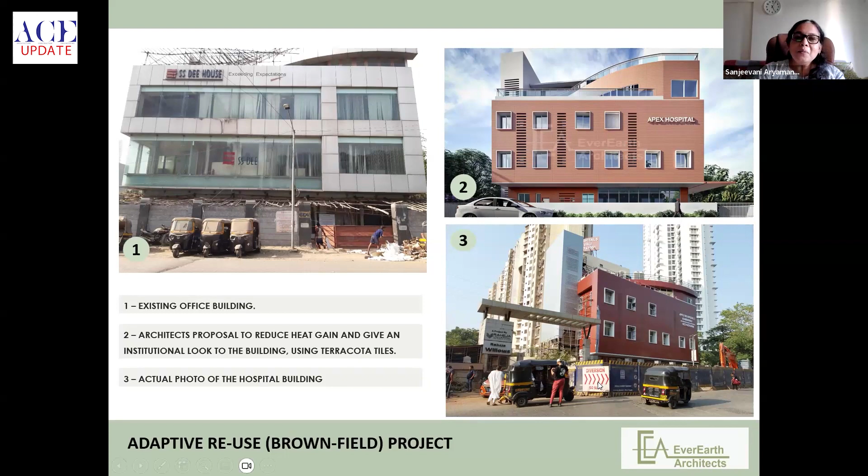So then, basically a greenfield and a brownfield. In healthcare we see this very distinctly, that there is a doctor who has already seen some property and wants to make a hospital here, has bought this, and now wants you to do this. So this is basically a brownfield development. This is a very sustainable approach because, as I told you, it is having everything ready, unlike in a greenfield project.

You have to design from scratch. You have to put all your infra in place. You have to bring in material from outsourcing, from some other place, so we are reducing on the carbon footprint. It's already practically zero here because you're already using whatever is there in place. So first of all, we try that if the client has an existing building, we try to give him solutions into that. But if it's not fitting in, and if he really is insisting, then we have to go for a greenfield development.

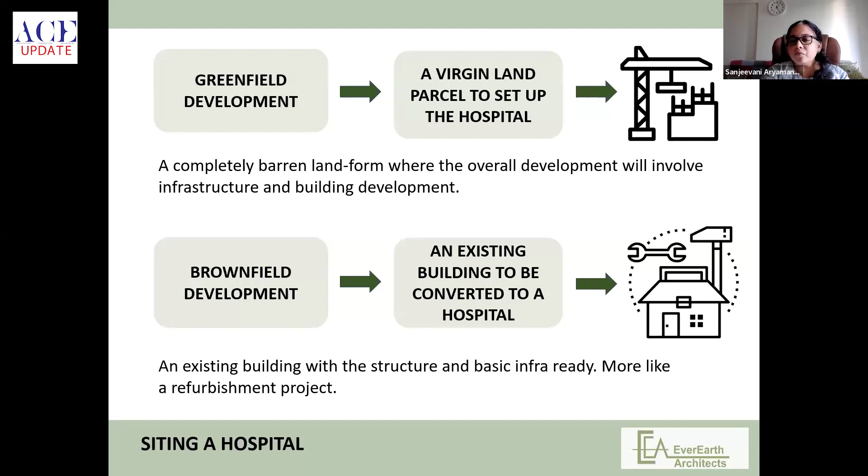This is one building where, again, in a hospital the facade becomes a challenge because none of the floors are repeated, they are not replicated. So there is an OPD on the ground floor, probably endoscopy on the next floor, then there comes an OT where there are no windows, cath lab where there are no windows. So there are certain floors with certain windows, then other floors with windows which are not aligning.

So usually we have a false facade to it, where we also take care of external plumbing, all these services that can be taken from outside, and have more of a regularized facade, so that it gives at least a better aesthetics to the building. But this also helps us create a buffer for the heat gain, so there's no direct heat gain onto the envelope of the building.

So in ICUs or in OT and all that, these rooms basically have more of HVAC to be dealt with. So you can actually, in a healthcare building, segregate air conditioned space and non-air conditioned space. That exercise also is taken up. I'll come to that further.

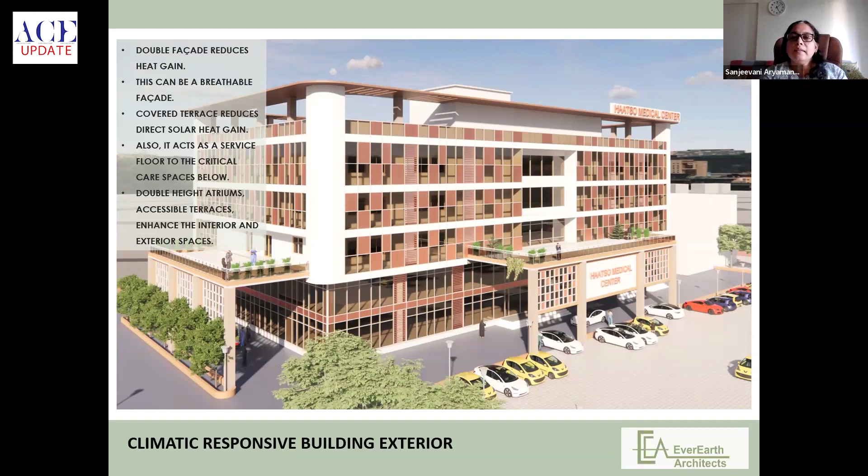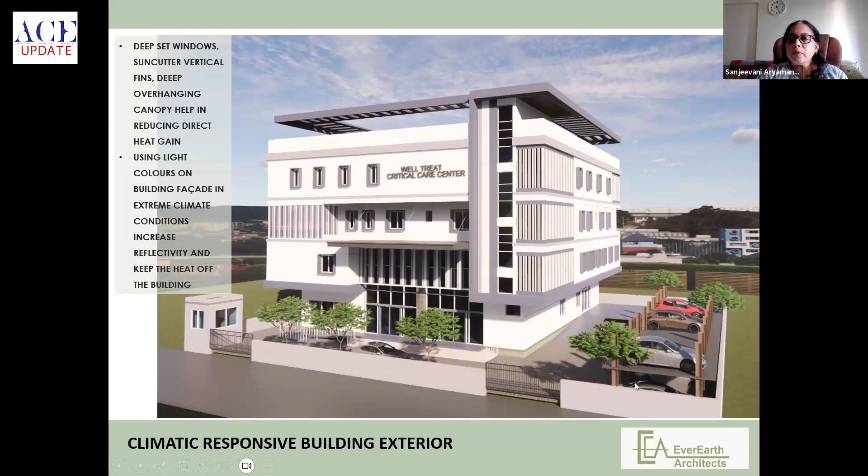So yeah, again, these were like deep set windows with fins. Then there is a canopy which is again having shading to the glass and all that. Again, the terrace is partly shaded so that internally there are solar panels and all, but at the periphery we had a pergola type, or like an umbrella to it. All our MEP spaces were again with louvers and all that, so it is a breathable space, most of that deep set with vertical louvers.

This was in a hot and dry climate I was talking to you about earlier. So the building is facing, you can say, north south, or rather more northwest, so we are not having more of an eastern facade. Because of the wings, the major facade on the east and west is broken, and there is a space between the two buildings of around 10 to 12 meters, which helps good wind flow between these two building floor plates.

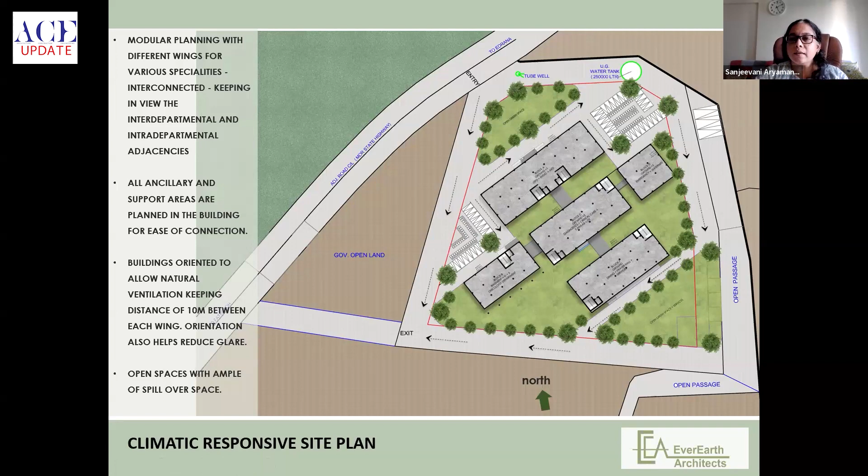Also, why we did this was to do one more thing. Now this first block is our completely daycare, where we have OPDs and all these things, so in the evening this block is completely shut. Only the critical care and the residential, that is the IPD floors and all that, these are working. So your HVAC and all these things are totally segregated from the critical areas, so you can actually save on your energy. When you're shutting this off, it's not consuming any energy, so we are reducing energy. Segregating the departments, having it totally out of the main critical zone, is also helping us reduce the energy requirement. That was another elevation where we were using the same fabric.

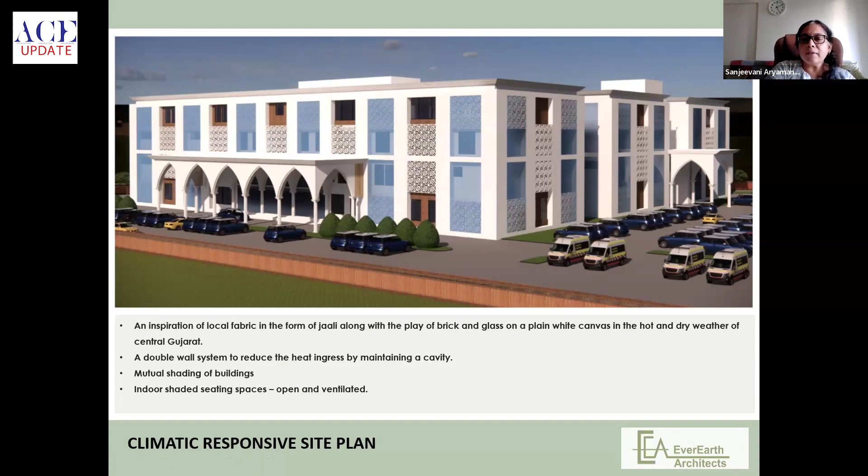This is again in Gujarat, but this is more of a trust hospital, which again had majorly jalis and more venturi effect, as Nikita was just talking about. And again, minimizing the glass. The client really wanted glass, but we tried to minimize it while also adding something more. So we had a play of glass, jali and brickwork, along with plastering and all that. That was another elevation, or the same building, which eventually developed like this.

When we talk about the building plan, again when we are saying a deep plan, this is our regular approach. Courtyards offer a better stack effect. Your lighting and ventilation are better resolved into a courtyard kind of formation. There is good ventilation here.

In hospitals where there are critical floors, like OT and all that, we are not doing courtyards there. But when it comes to OPDs, these kind of spaces where there is a lot of occupant load, you can have open spaces where people can go out, relax, and whenever their number comes they can come and sit. That kind of thing helps when we have a courtyard and some spaces around.

So this can be one block. Then the spine, then it's another segregated or different block, well connected, into a critical block, so the spaces are flowing into each other.

Linear plans are always better, where you can have light ingress from both sides. Light is very important in a healthcare building, and it is always a relief, because dark and shady spaces don't really work well.

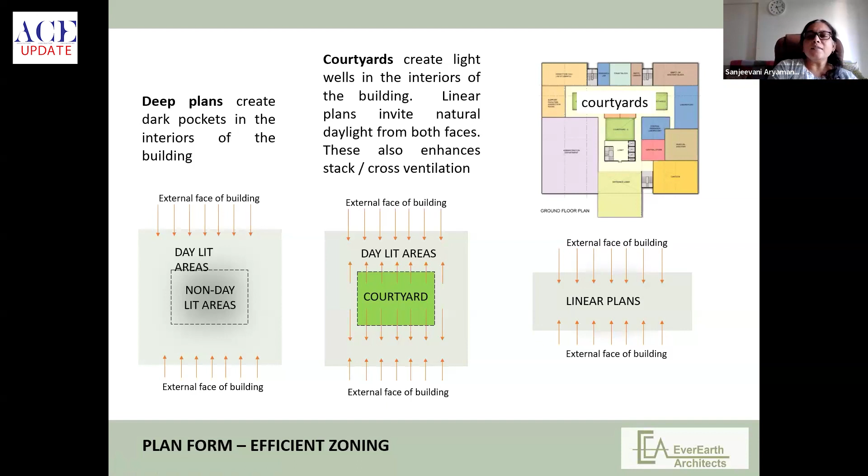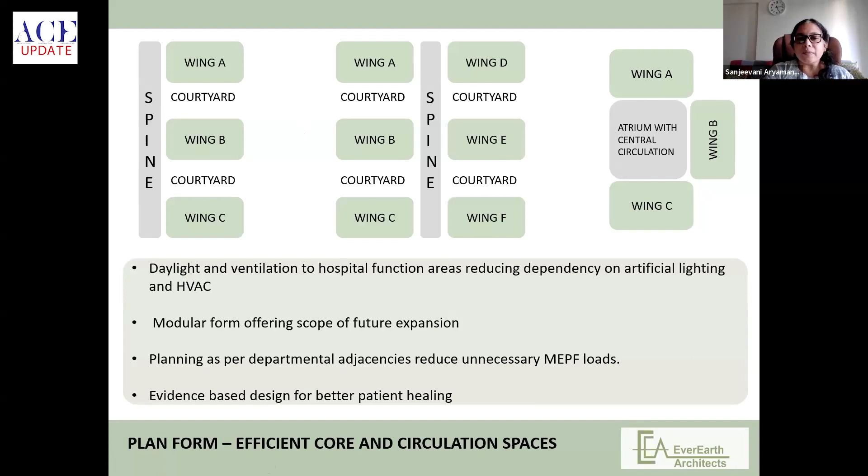It can give a sick building syndrome kind of effect, and it is not healthy. So basically how corridors are placed, how we can bring up modular planning, so that it is efficient and you can reduce the energy loads in different modules. Stacking of the floors, how we do the stacking, where the service floor is going to come, is also a very important decision in a healthcare facility.

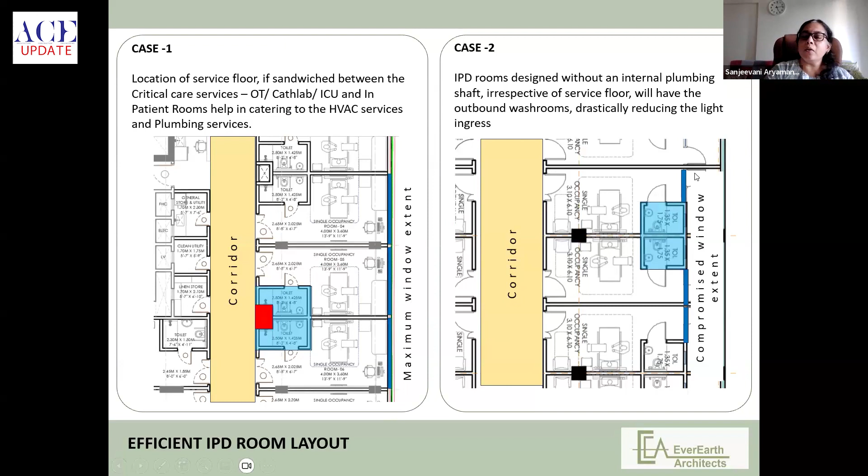Again, the corridor, basically in such rooms where we have a typical hotel arrangement, you have maximum light coming into the space. When there is a toilet on the external side, there is a minimum light window which comes through. Again, in an ICU for example, if the beds are facing towards the outside, it is a relief to the patient.

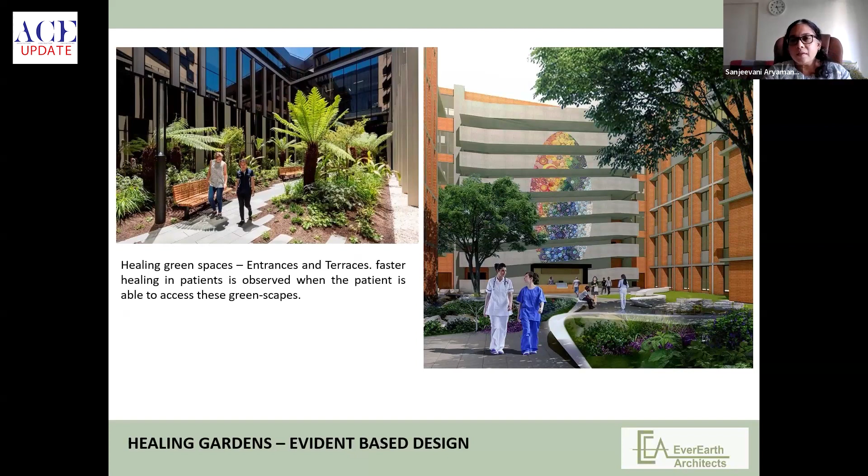Reduction in waste. Hospital waste is a major criteria, where you need to look into different sustainable measures for how that can be resolved and taken care of. So reduction in waste, improved air quality, reduction of carbon footprint by using the existing infrastructure rather than new, and using renewable energy, green building technologies, energy efficient water management - all these things are really important even in healthcare.

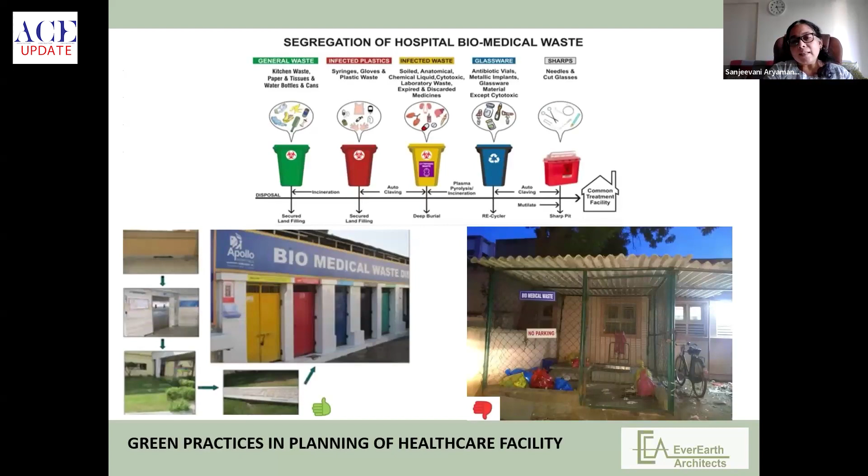Again, as I told you, waste is a major problem that the healthcare industry faces, and practically everything goes into the landfill. So that's a big concern. Segregating AC and non-AC areas is what we had discussed. Typical orientation and our solar panels and all that comes along.